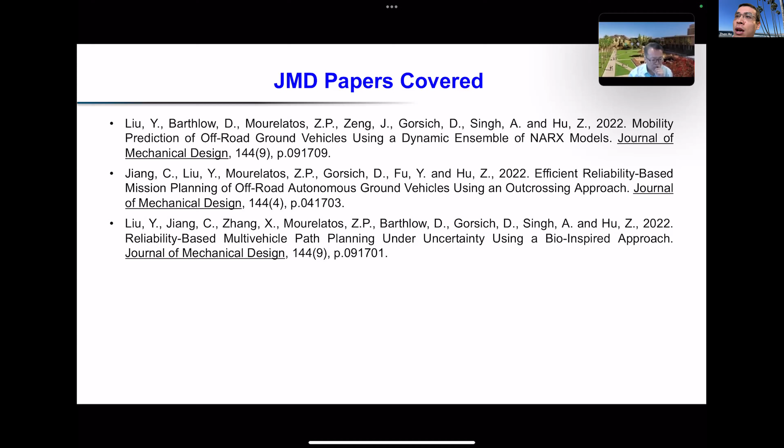So first, a little bit of background introduction. All three papers we published on Journal of Mechanical Design focus on off-road autonomous ground vehicles. Off-road AGVs are vehicles that operate autonomously in off-road environments. They have both military and non-military applications, for example mining, construction, agriculture, and exploration of Mars.

For all these off-road autonomous ground vehicles, a very important topic is mission and path planning, because that governs how the vehicle will operate in the off-road environment, and it plays a very important role in guaranteeing successful operation of the off-road autonomous ground vehicles.

In terms of path planning algorithms, in the past years many approaches have been developed, including global path planning methods and local path planning methods. Especially in recent years, for on-road autonomous vehicles, many path planning algorithms or model predictive control methods have been developed using LiDAR or vision-based detection. But those LiDAR or vision-based detection methods for on-road autonomous vehicles sometimes are not applicable for off-road autonomous ground vehicles, for many reasons.

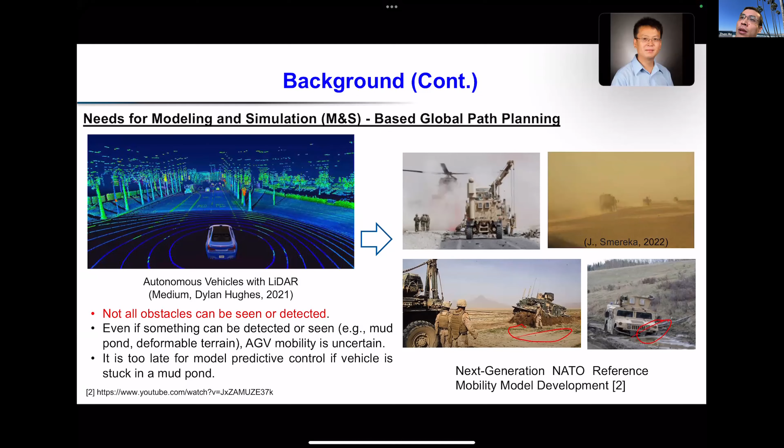In terms of physics-based modeling and simulation for mobility prediction, we start with some soil map and height map, and we also have a vehicle design in the physical environment. Based on this simulation, we can perform vehicle dynamics analysis to predict vehicle mobility, and also account for the interaction between the vehicle and the terrain to predict the speed and vertical acceleration of the vehicle.

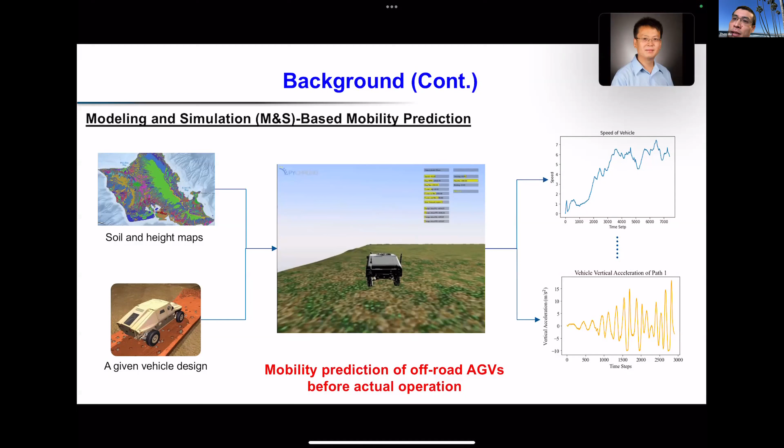But in the off-road environment, a major challenge is that it involves many sources of uncertainty. For example, for soil at any point, there are many uncertain soil parameters, including cohesive strength, friction coefficients, bulk density—these are just some examples. There is also uncertainty in the slope.

As a result, there is uncertainty in vehicle mobility. As shown on the right, due to this uncertainty, sometimes the vehicle can pass a certain region, sometimes it cannot. So it's very important for us to account for the uncertainty in vehicle mobility caused by uncertainty in terrain, soil, and vehicle parameters. By considering this uncertainty, we can better design our autonomous vehicle and incorporate post-design operation conditions into the design to ensure reliability and safety of autonomous ground vehicles in the off-road environment.

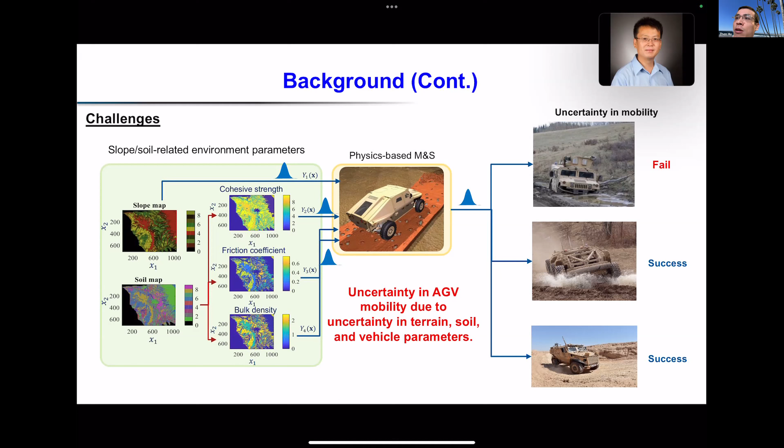So in order to address the uncertainty issue in the off-road environment, there are several challenges that need to be addressed. The first is the computational effort issue. The high-fidelity simulation model can predict vehicle mobility, but it is very computationally expensive—it cannot be directly used in our design optimization or path planning.

Our first paper on a dynamic ensemble neural network model addresses this first challenge about computational issues. The second challenge is how to incorporate the reliability constraint into real-time mission planning. The other of our Journal of Mechanical Design papers addresses this second problem.

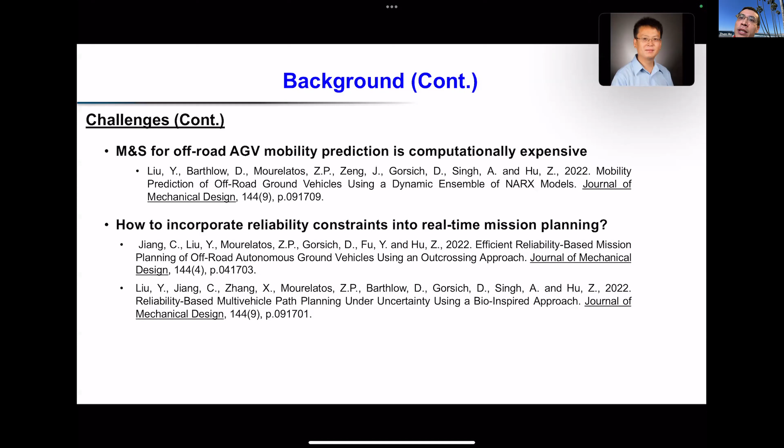Here I will give a brief overview of what we have done in these three papers. For the first paper, the overview is that we first use the physics-based simulation model. By giving some paths, we generate synthetic mobility data, and based on this synthetic mobility data, we can use AI or machine learning models to build a data-driven and dynamic mobility prediction model.

This data-driven and dynamic mobility prediction model is very cheap to evaluate, but it can accurately predict vehicle mobility, and it can enable us to perform model-based mission planning.

However, in our research, we found that none of the current available methods, including LSTM, NARX-Net, and GP-NARX, can accurately capture nonlinear dynamic behavior of the vehicle vertical acceleration due to the nonlinear dynamic system. For example, there are large errors at the peaks of the acceleration.

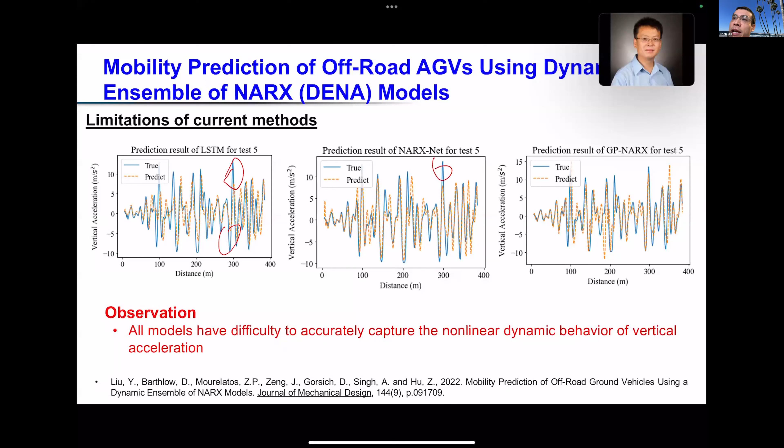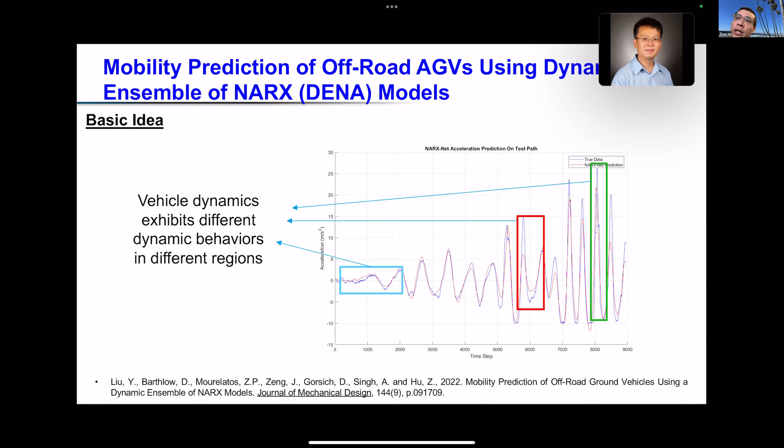Based on this observation, we also noticed that on certain paths, the vehicle dynamics exhibit different behaviors in different regions. For some regions, it has low frequency dynamic behavior. For other regions, it has high frequency vibration behavior.

Based on this observation, the idea we proposed is to partition the dynamic domain into different segments, so different segments capture different dynamic behavior of the vehicle. We construct individual NARX models for different segments, and then we ensemble them together. By doing this, it can improve the prediction accuracy of the data-driven mobility model.

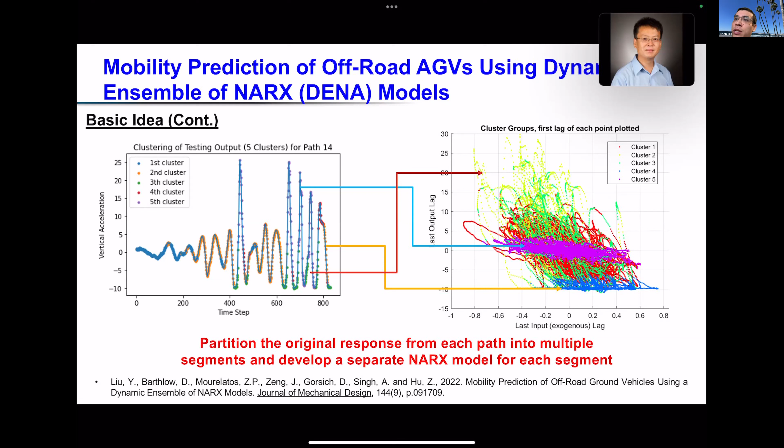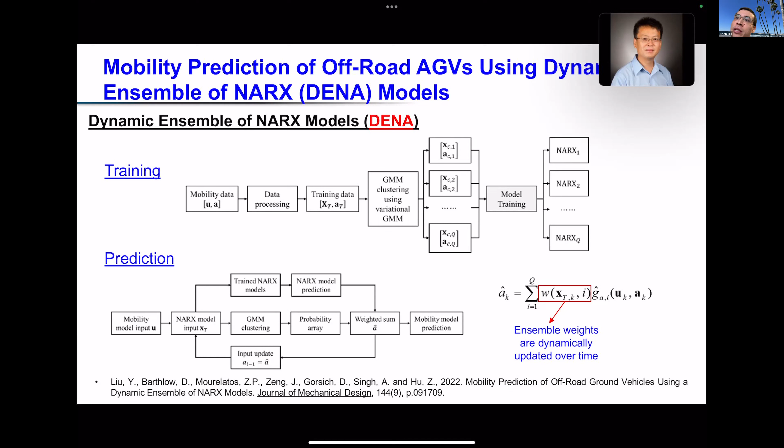This is the overview of the flowchart. It involves several steps, including synthetic data collection, partition of the dynamic domain, training of individual models, and finally ensembling them together by considering the prediction uncertainty.

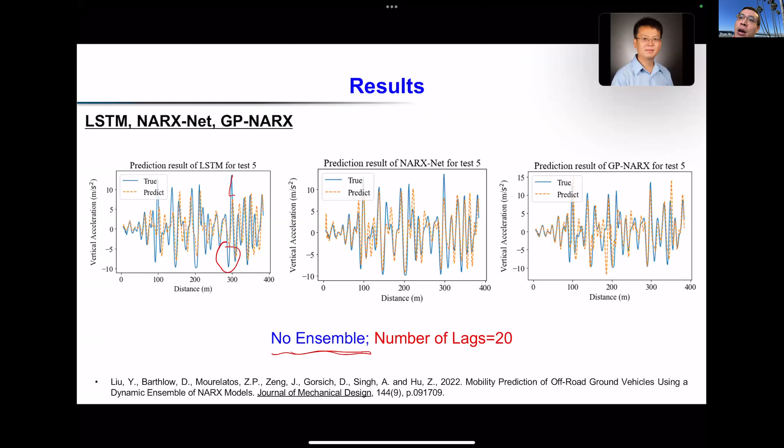Here are some results. This part shows that STM, NARX-Net, and GP-NARX, without using any ensemble, have some errors at the peak of the vertical acceleration.

So after we have the data-driven mobility model, the next question is how can we use that for mission planning by considering reliability. This has been addressed in two Journal of Mechanical Design papers.

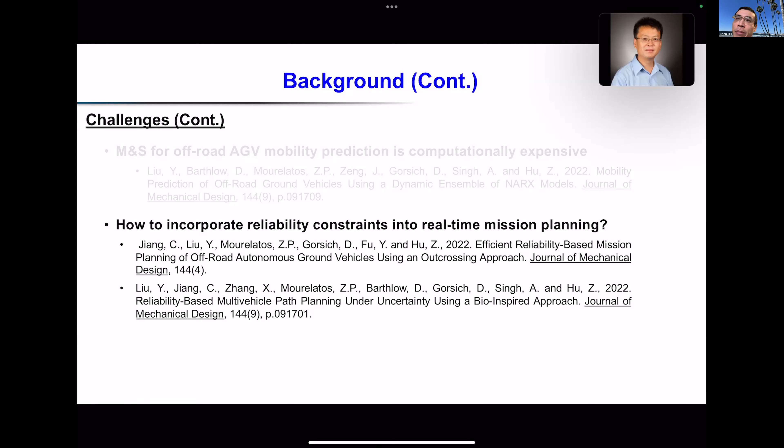The overview of the optimization problem is shown here. Our objective function is to minimize the travel distance or travel time of off-road autonomous ground vehicles. At the same time, we consider the uncertainty in travel time or length caused by uncertainty in the soil properties. We formulate the overall problem as a robust reliability-based design optimization problem.

The objective function is a robust design objective function, and at the same time, we add a reliability constraint into the optimization problem. The reliability constraint we added here is called the mission mobility reliability constraint.

This mission mobility reliability is also proposed in one of our Journal of Mechanical Design papers.

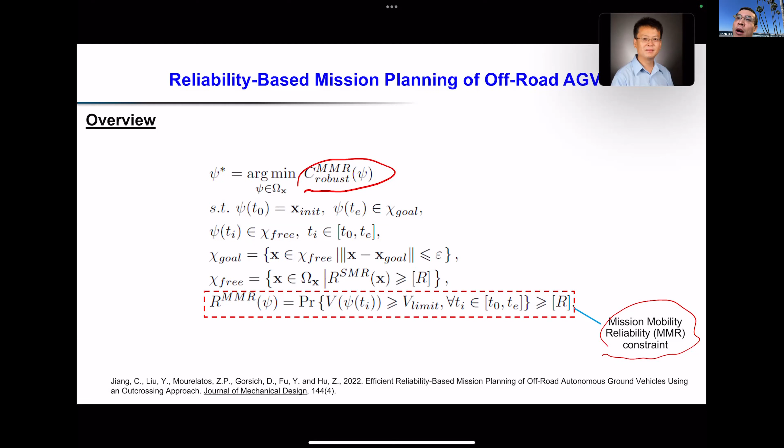In order to solve this optimization model, we created a reliable and robust rapidly-exploring random tree algorithm. Basically, we modified the RRT star algorithm by incorporating reliability constraints and robustness considerations. So every time we add a node in the search domain, we verify the reliability constraint to see if it can be satisfied.

By doing this, the final identified path from RRT star can not only be the shortest, but can also satisfy the reliability requirement.

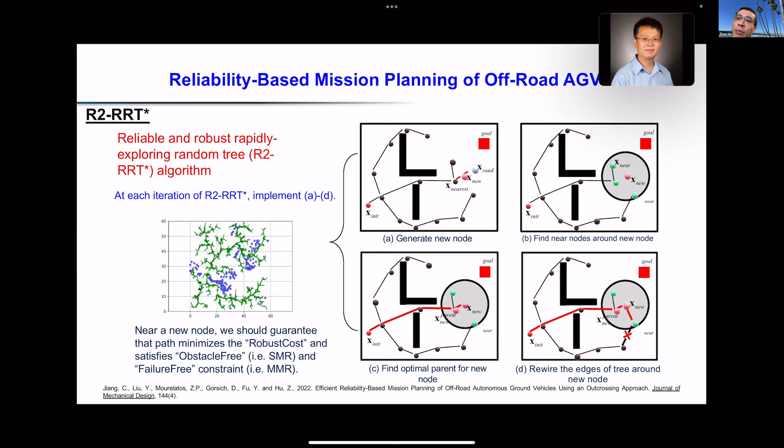But the issue with this problem is that evaluating reliability is very computationally expensive, even if we use the data-driven mobility model. If we use direct Monte Carlo simulation, the RRT star for path planning may take 1 or 2 hours. It's not practical or computationally feasible for practical application.

To address that issue, in this Journal of Mechanical Design paper, we propose an outcrossing rate based method. Basically, we compute the outcrossing rate at every spatial location. By doing that, we can convert the probabilistic mission planning problem into a deterministic mission planning problem, reducing the computational complexity.

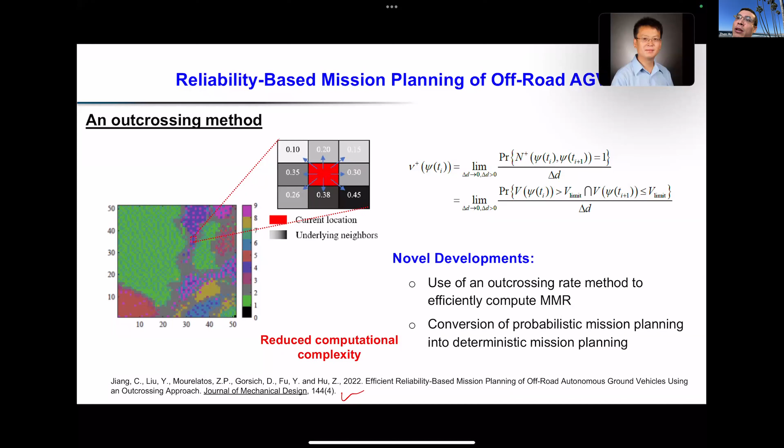The proposed method starts with the soil map, slope map, and physics-based simulation considering uncertainty, and then we generate a probabilistic map.

Using the probabilistic map, we can generate a group of outcrossing rate maps. Then we integrate the outcrossing rate maps into the RRT star, and we can identify paths that satisfy the reliability requirements. Here are some results from our proposed method.

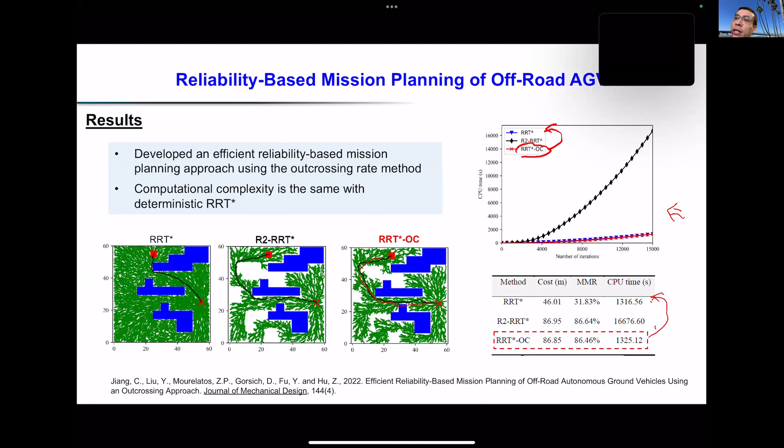And also the reliability requirement has been satisfied. So we also go one step further by looking at multiple vehicle path planning.

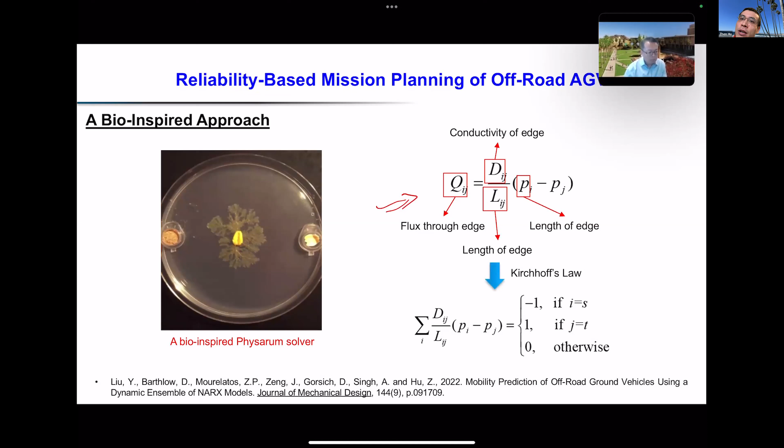We have developed a bio-inspired approach. Basically, we model the map as a graph, and then model the links of the graph using this equation. And then finally, we solve this optimization problem using a solver.

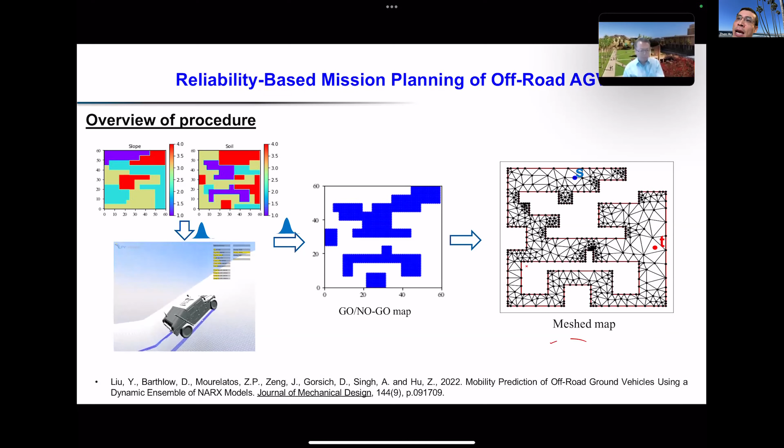So by using the solver, we also start from the simulation. We first generate a go and no-go map by considering reliability, and then we generate a meshed map. After that, we're using the proposed methods. We can efficiently identify the paths, satisfying reliability requirements.

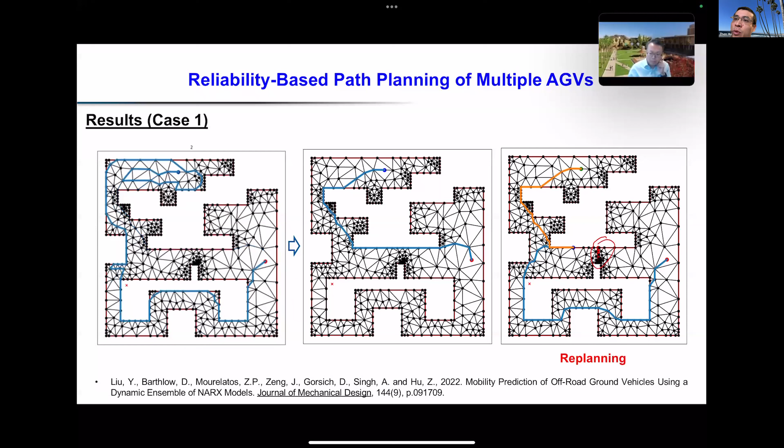Most importantly, if there is an obstacle in the middle of the path, the algorithm can very quickly perform replanning. So we also applied it to this path planning for multiple vehicles.

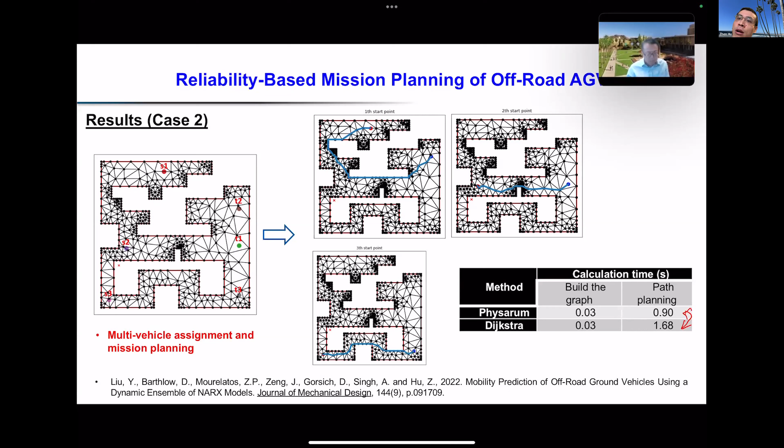Suppose that we have 3 vehicles, S1, S2, S3. We want to reach 3 targets. The proposed method can automatically allocate these 3 vehicles to the 3 targets, and at the same time, identify the shortest paths and satisfy the reliability requirements. And the computation time here is also much lower than the traditional Dijkstra-based method.

Okay, so in conclusion, here's an overview of our 3 papers published on the Journal of Mechanical Design. In these papers, we developed a dynamic ensemble method for mobility prediction. We also proposed a reliability-based mission planning algorithm by reducing the computational complexity, for multiple vehicle mission planning.

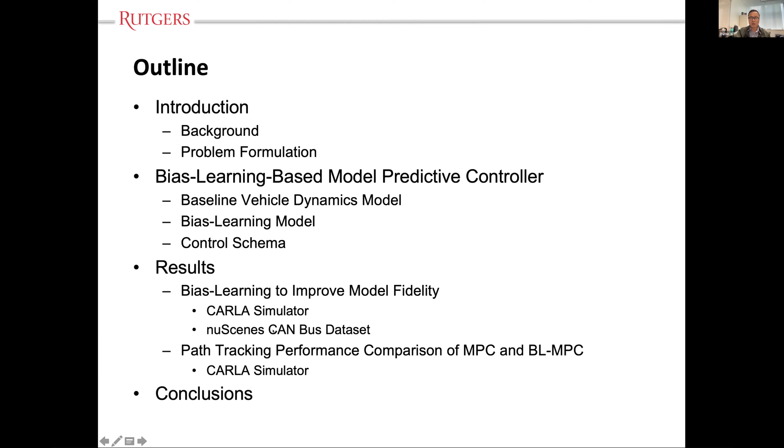So here's the outline. I will give an introduction, then I'll move to the proposed bias learning-based MPC. Then I will show you 2 results, one from the driving simulator, another from actual real-world experiment data. Then I'll draw some conclusions.

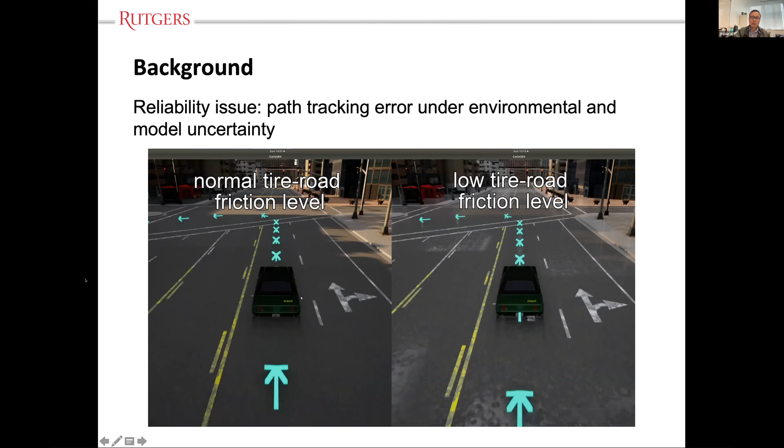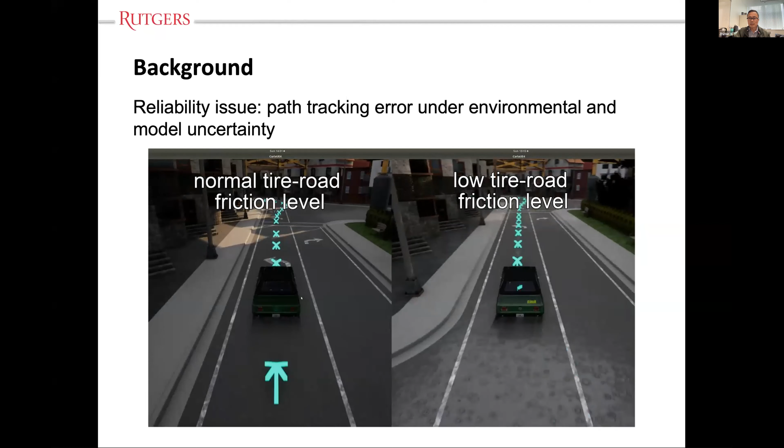So first of all, we realize there are some potential reliability issues for path tracking if you ignore environment and model uncertainty. On the left-hand side, I show a good situation: good weather condition, good tire conditions. On the right-hand side, we have a relatively bad situation. Now, if you rely on model-free, let's say PID control, or other low-fidelity models, you will have a reliability issue, as you can see on the right-hand side.

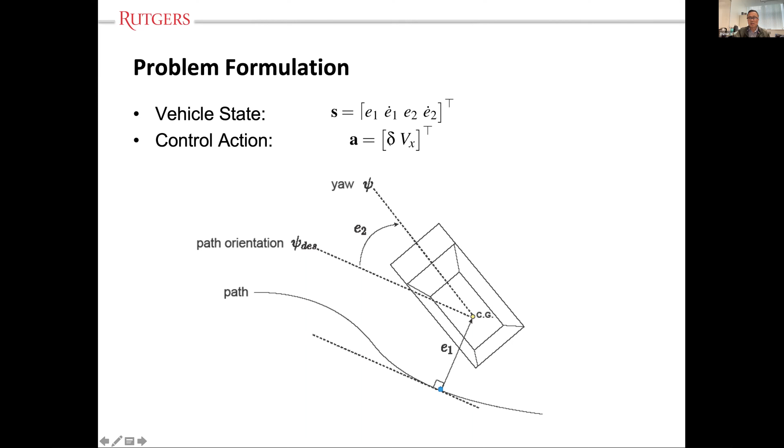And the vehicle action space is only 2 dimensions: one is the steering angle delta, and the other is the vehicle's translational velocity.

Now, since we're going to rely on this MPC, model predictive control, we have to use a physics-based vehicle dynamic model. The model we're going to use is the so-called bicycle model. Basically, in this simplified version of the vehicle dynamic model, we merge the 2 front tires into 1 front tire, and merge the 2 rear tires into 1 rear tire, so it seems like a bicycle—that's why it's called a bicycle model. In this bicycle model, we also consider the slip angle of the front tire and the rear tire.

You can see in this diagram, the front tire has a heading, the steering angle delta, but the actual motion of the front tire is different from the steering angle. So we have alpha F as the slip angle from the front tire, and also the slip angle alpha R from the rear tire.

Now to quantify this vehicle dynamics, we have differential equations, and all the vehicle states can be represented by this so-called baseline vehicle dynamic model.

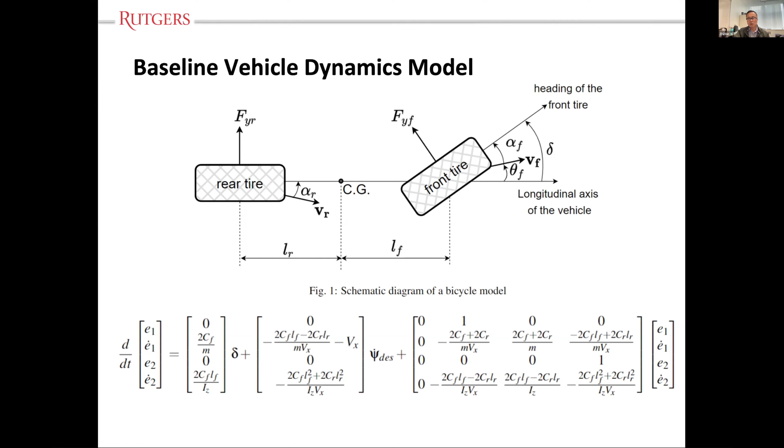The proposed approach is that because of these simplifications, if we consider the actual motion of the actual vehicle, this simplified model will give us some error, and that error could lead to unreliable path tracking.

So the proposed approach is that we're going to use this baseline vehicle dynamic model, but in addition, we're also going to add a machine learning model. This machine learning model tries to learn the bias of this baseline model compared to the actual observation. So that's the bias learning model.

We propose 3 different methods to do that. The first is a Gaussian process. We also use a recurrent neural network, an offline version and an online learning version. So 3 models to try to learn the bias, and we did some comparison.

In this setup, the input we're going to take is 4 vehicle states and a 2-dimensional vehicle action space. We also have the environmental variable, which captures the tire and ground friction coefficient for the vehicle. The output of this model predicts the next states of the vehicle at the next time step.

In terms of the overall control principle, based on this BL MPC, at every control cycle, typically 0.1 second, we need to solve an optimization problem. We try to minimize this objective function, and in this objective function there are 3 terms.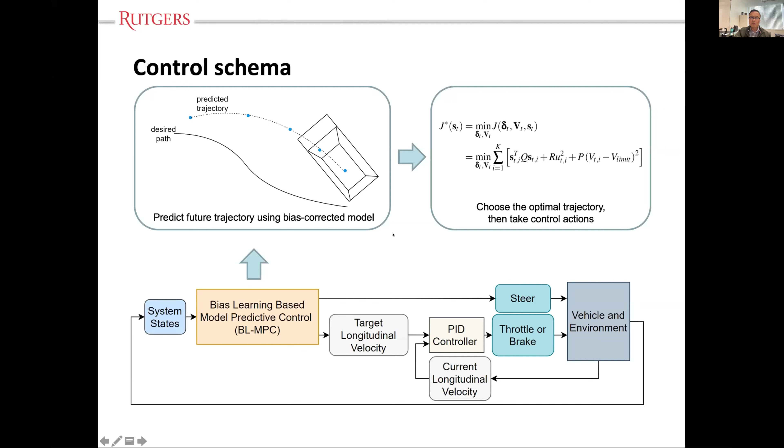And the third term, we try to make the vehicle run as fast as possible up to the speed limit. But of course, we need to keep this stable.

Now, in order to learn this bias model, we have to get training data. As previously explained, we have an input space defined from 4 vehicle state variables, a vehicle action space with 2 variables, and 1 variable for environmental uncertainty.

And then the output we take is the actual observed vehicle state, subtracting the predicted vehicle state from the baseline bicycle vehicle dynamic model.

When we did this training in the simulator, we conducted about 30 minutes of training, with every control cycle at about 0.1 second. So 30 minutes means 30 times 60 times 10, giving us about 18,000 training data points for 30 minutes of simulation.

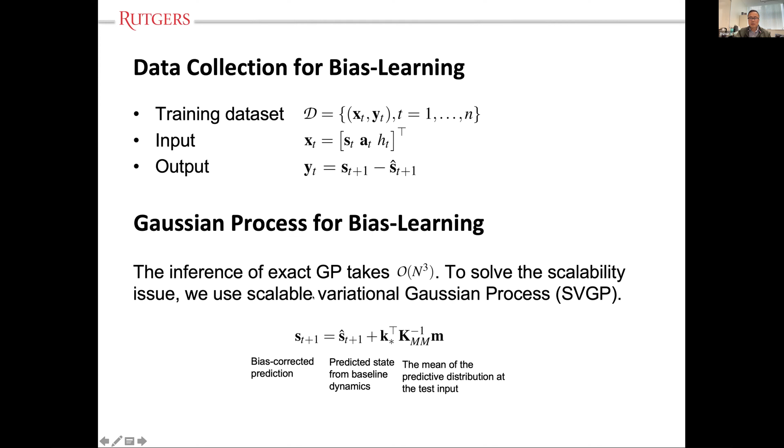Now, in order to build this bias learning model for this large data point set, the traditional Gaussian process has an issue because of the large data size. That's why we adopted this so-called scalable variational Gaussian process. We basically get representative sample points so we can reduce the matrix inversion operation, so that this Gaussian process can be used for bias learning.

Now, the second model we used is a recurrent neural network model. I'm not going to show the detail, but the hidden node in the recurrent neural network model is the key thing, and each hidden node is represented by a so-called activation function. That activation function takes all 7 input variables xt, and also takes the previous hidden state. That's why it's called a recurrent neural network, and it also has a bias term.

We can define different numbers of hidden nodes and different numbers of layers, and the output will predict the next time step vehicle states. So that is the offline version.

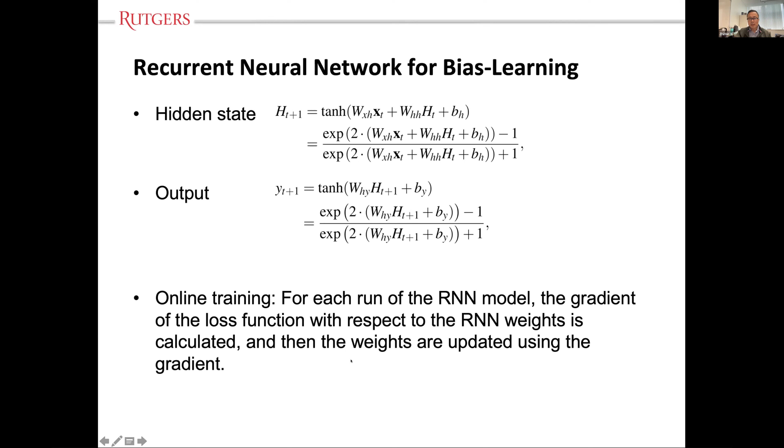In addition, we also have an online learning version. The online learning version is basically, we have an offline RNN model learned, but when the vehicle is really doing the control, it also observes the actual bias and tries to further update the weight coefficients in the offline learned RNN model, so that we expect this online learning model to be more accurate.

Now, to validate our proposed work, we found a real world data set for autonomous driving. This is a nuScenes data set. It has all different situations.

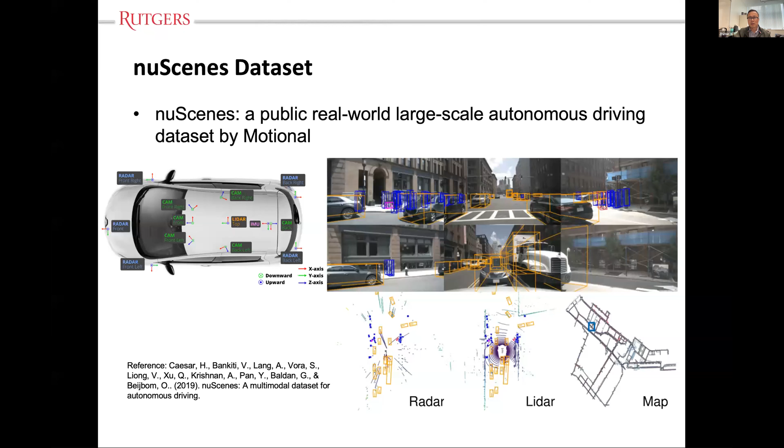For this particular problem, because we are working on a lower level control problem, we need a lot of detailed information. This nuScenes CAN bus expansion dataset is able to provide the information we need for our validation work. So here I just show you one of the scenarios.

For example, it provides a high precision map, and it has its defined path. Then it knows the vehicle's actual position, and it knows the vehicle's actual pose all the time. At the same time, at any time instance, we know all the vehicle's real vehicle speed and wheel speed. So we know all the information we need for our model to do the validation. That's why we use this nuScenes CAN bus dataset.

In this dataset, we have a total of 1,000 different driving situations. We split this dataset into a training dataset, about 70%, then 20% used for validation, and 10% for testing. To quantify the tracking error accuracy, we use the mean absolute error as a metric. Once we validate on the test data, we calculate all the MAE, and we get the average value.

Now we compare 3 methods: one is a simple baseline model based on the MPC, then we have offline RNN and online RNN. You can see the MAE difference. Basically, the online RNN model provides us the best tracking error, the minimum tracking error from the density functions. The baseline model provides us a relatively large tracking error.

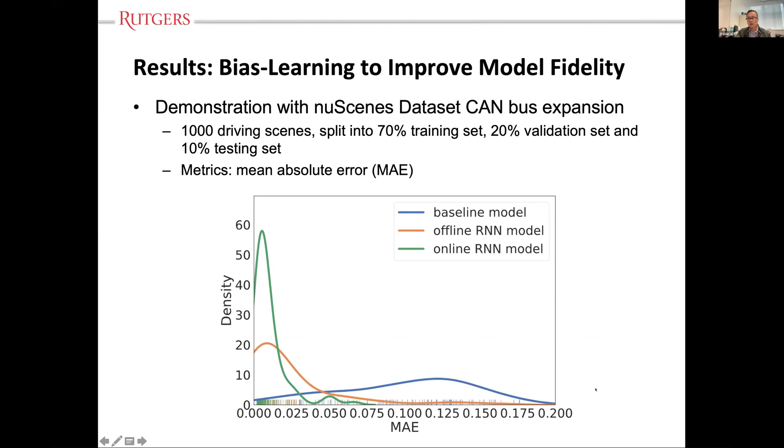That is a result from the existing experimental data, but we also further confirm those results using our CARLA simulator. In the CARLA simulator, we have different driving maps and different driving situations, and we use some as the training scenario. Then we do the test at the actual situations.

In this table, I show you 3 columns of results. Basically, mu equal to 1 reduced to 0.25 means increasingly worse environmental conditions, so we have harder control situations. Then we compare the baseline model with the Gaussian process, and the offline version RNN and online version of RNN in terms of tracking error. In all these scenarios, the online version RNN provides us the minimal tracking error.

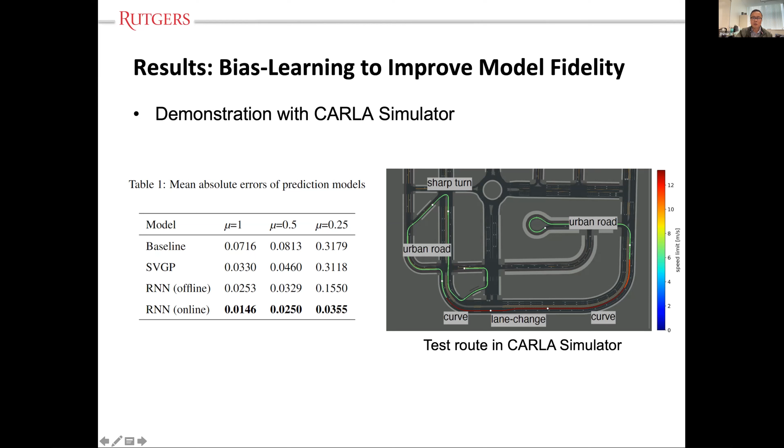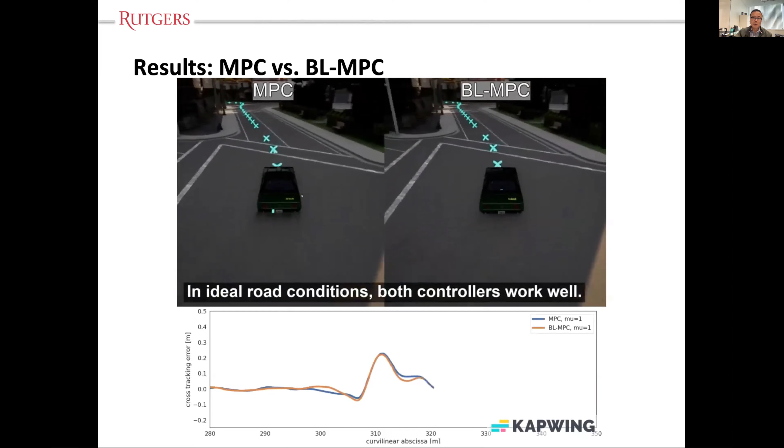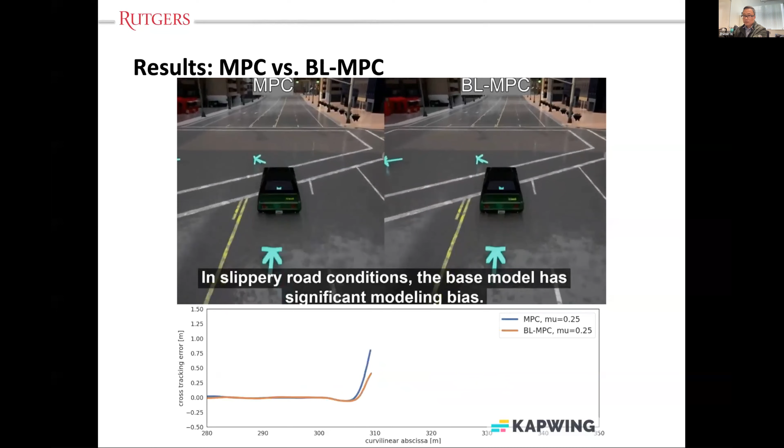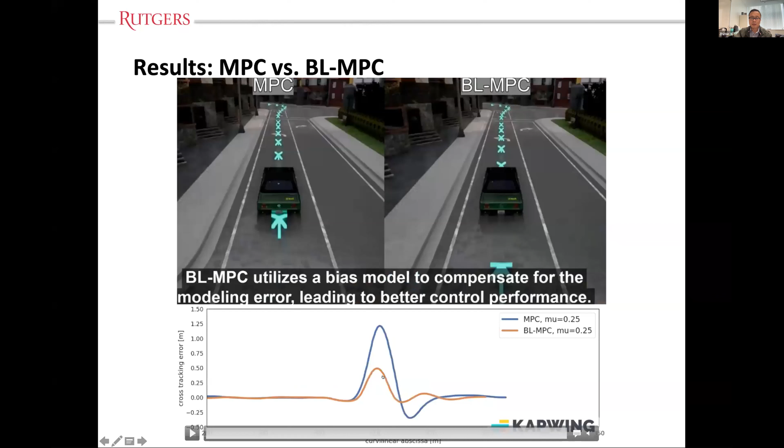Here I show you one of the comparisons between MPC and BL-MPC using the CARLA simulator. This is a situation with good weather conditions, and the bottom figure shows you the actual cross-tracking error with respect to time. Then we have worse situations. Compared to MPC and BL-MPC, BL-MPC always provides a smaller tracking error if we are able to learn those biases accurately.

So the conclusion is that we basically proposed bias learning based MPC, and that can generate more reliable control under different driving situations for autonomous vehicles. We also use the RNN, and this RNN with online learning feature performs best, because the reason is this model bias model is also adaptive to real-time situations. In our problem, we found the RNN performs better than the Gaussian process, especially because it has its recurrent feature, which is important in this setting, because all the previous states will somehow determine the next future state. That can be captured by the RNN structure.

So that's all for my talk.

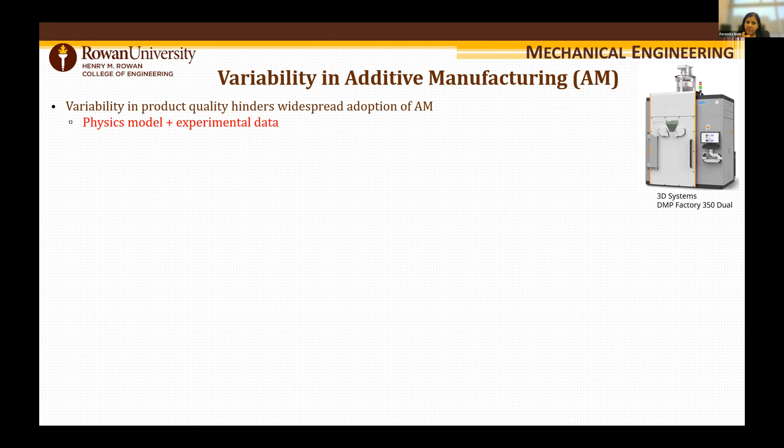Additive manufacturing is a technique that is widely popular in this world nowadays, but due to the variability in product quality, it is still not widely adopted across all industries. The trial and error process of finding out the optimal process parameters is expensive, and no physics-based model is accurate. So there is a push for using an integrated process of combining physics-based model predictions with some experimental data.

So there is this need for optimization of the AM processes, and also for process optimization during the manufacturing, which is basically process control. Now, when we talk about models and about additive manufacturing in general, there are different kinds of uncertainties and variabilities in the AM processes. These uncertainties, which are inherent to the system and the process, are the aleatory uncertainties.

There is also lack of knowledge, which leads to epistemic uncertainty that could come from model parameter, model form, and also from input uncertainty. Additive manufacturing is a complicated process, so all these processes need to be defined by different physical processes, requiring multi-physics, multi-scale models, which leads to more sources of uncertainty.

So we need to quantify and reduce the uncertainty, and that can be done under the Bayesian framework using verification, calibration, validation, and better characterization through experiments, etc. And then we also need to do uncertainty management.

We have reduced the uncertainty that we can, but we still have to live with some of it. That is where you need process optimization and control under uncertainty - process optimization that requires offline information, and process control, which gets the most up-to-date knowledge during the manufacturing process.

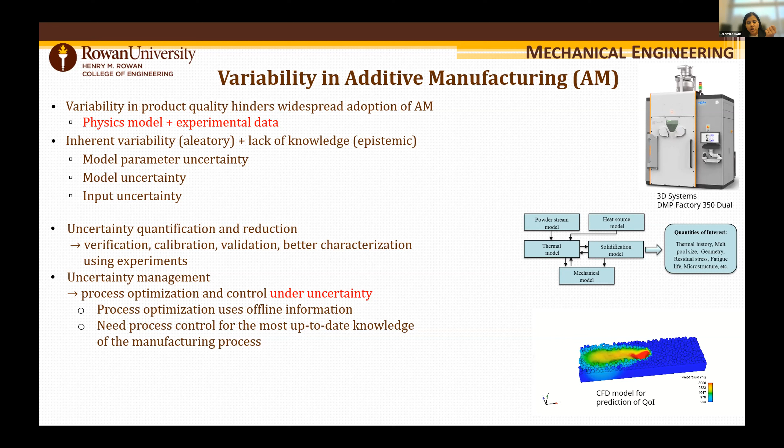This leads to the concept of digital twin, but since there is so much uncertainty in the process, this is not a deterministic digital twin, but a probabilistic digital twin.

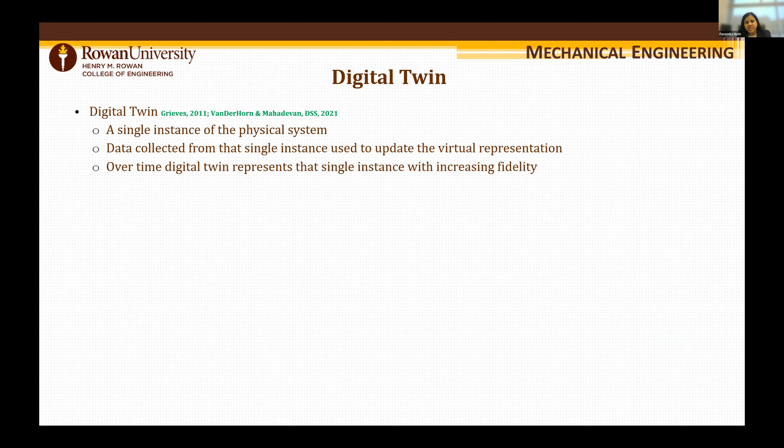Now, how do we define a digital twin? The work on digital twin is a few decades old, and one of the definitions that Grieves and Vickers came up with in 2011 is that a digital twin is a single instance of a physical system, and the data collected from this single instance is used to update the virtual representation. Over time, this digital twin now represents that single instance with increasing fidelity.

So there are three different elements of a digital twin: the physical system, in our case the printer itself, and a virtual representation of the system. These two systems are connected through two interconnections - a connection from the physical reality to the virtual space and from the virtual to the physical.

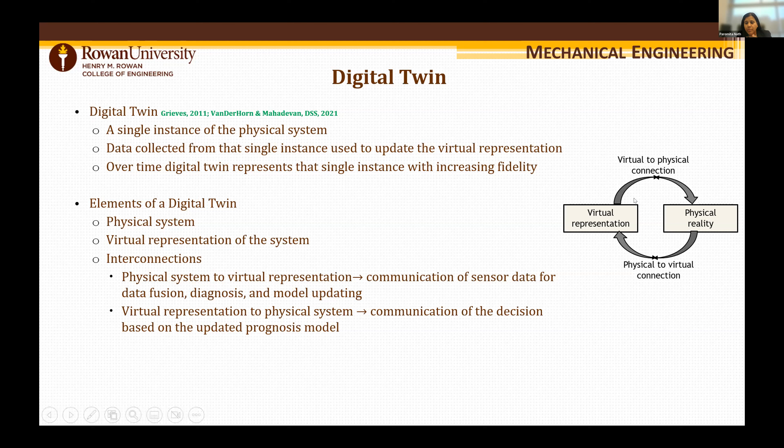One connection leads to the communication of sensor data, which is for data fusion, diagnosis, and model updating, whereas the other connection leads to decision making - how do we update using the updated prognosis model, and how can we make decisions for the physical reality.

So in this work, we are concentrating on digital twin for the laser powder bed fusion process. The physical process is actually the additive manufacturing machine itself. The digital model, which consists of the CAD model and the STL file, feeds into the AM machine.

During manufacturing, we can monitor the system using the monitoring system. The virtual representation of this would be a physics-based model, and as I said earlier, one model may not be enough, so we may need a suite of physics-based models. Now, this is extremely expensive, and for decision-making while the process is going on, we need faster models, so we substitute this with a surrogate model, which gives us the prediction or the predicted QOI.

These two are then connected using the sensor data, which goes from the physical reality to the virtual representation. We do the model updating, find out what should be the print parameters for the future layers, and feed it back to the physical reality. This goes on for all the layers of the laser powder bed fusion process.

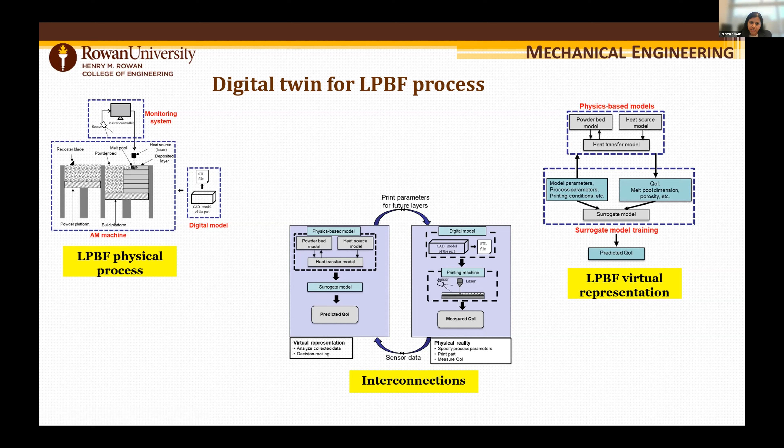So the basic method for this work is based on the concept of digital twin for laser powder bed fusion, where our quantity of interest is the lack of fusion porosity due to insufficient melting.

When we have the LPBF process, there are scans going on, and based on the distance between two scans, called the hatch spacing, and the thickness of each layer of powder, we will have some unmelted volume fraction - basically powder that gets trapped between molten volume and has never been melted because of insufficient heat in the process.

So if we want to control this unmelted volume fraction, which is basically a measure of porosity, we need to construct and deploy a digital twin. This consists of 9 steps.

We start with an initial virtual representation. We validate that virtual representation. We collect monitoring data, diagnose and infer the quantity of interest, which tells us what the current state is. Then we update the model.

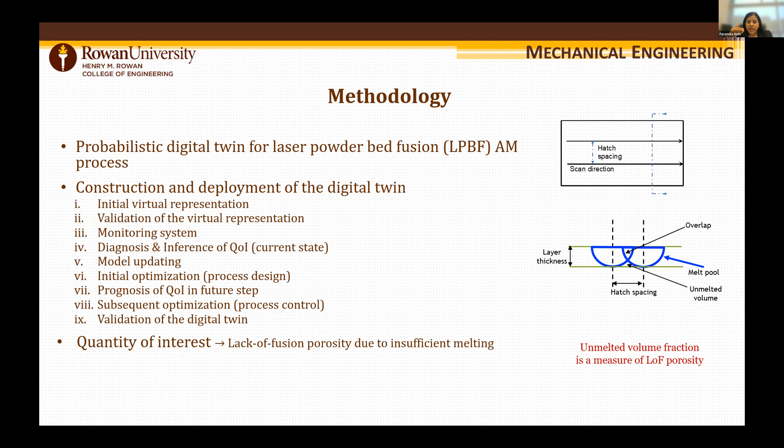We find out what is the initial process optimization, what initial process parameters we should start the manufacturing with. Then we can do the prognosis of the quantity of interest in the future step. Then we can optimize, which is the process control during each step of printing or for each layer. And then we also need to validate our digital twin.

So for the initial virtual representation here, we are using a very simple Rosenthal model, but whenever high fidelity models are available, you can obviously use that.

So this geometry-based model first starts with finding out what is the width of the melt pool, and from the width we can calculate what would be the unmelted volume fraction.

Now this initial representation can be validated, but we are not collecting data to validate this model at this step. We will use previous experiments or experimental data from literature or publicly available data to validate this.

For this, we could use different kinds of validation metrics, but in this paper we are using the model reliability metric, which is a distance-based metric that tells you the probability of the difference between the prediction and the observation.

If it is within a tolerance, then we are okay with this model, and then we can proceed with that. If not, then we need a better model.

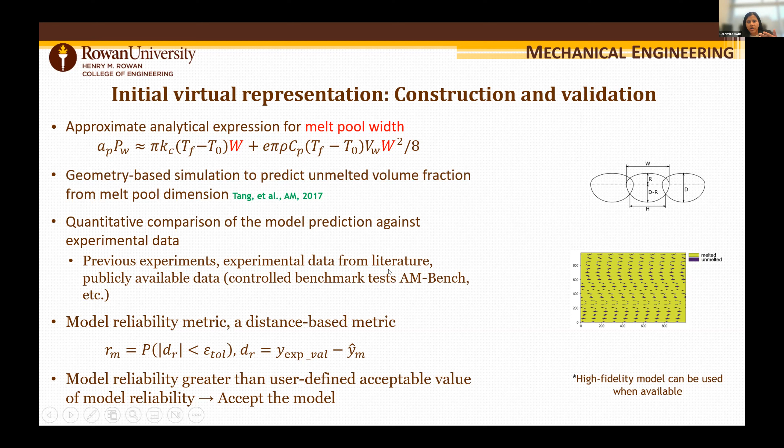So next, we are going to do the diagnosis and inference of the quantity of interest. And for a digital twin, an effective monitoring system is an online, non-destructive, non-contact monitoring system, which then gives us the current state of the manufacturing process and also the part.

And we can then find out our quantity of interest. If the quantity of interest is directly observable, for example surface roughness, which we can measure using a profilometer, or temperature distribution, which we can measure using thermal data or a thermal camera, then it's simple.

But some of the quantities like residual stress or other subsurface defects and porosity cannot be directly observed. And so in that case, which is the case in this paper, we need an indirect measurement technique.

And so here, if our quantity of interest is porosity, we do an intermediate quantity measurement, which is through the IR camera. We collect the temperature data, and then we infer our porosity from this melt pool dimension that we get from the collected temperature data.

And finally, when the part is actually finished, we can use offline techniques like X-ray computed tomography to find out what is the actual porosity of the part.

Now, because of this indirect measurement, we need a two-step surrogate model. The first step predicts the melt pool width, and the second step predicts the unmelted volume fraction.

The model parameters and the discrepancy term are calibrated using the temperature data, because that is the only data that we are able to get during the manufacturing process.

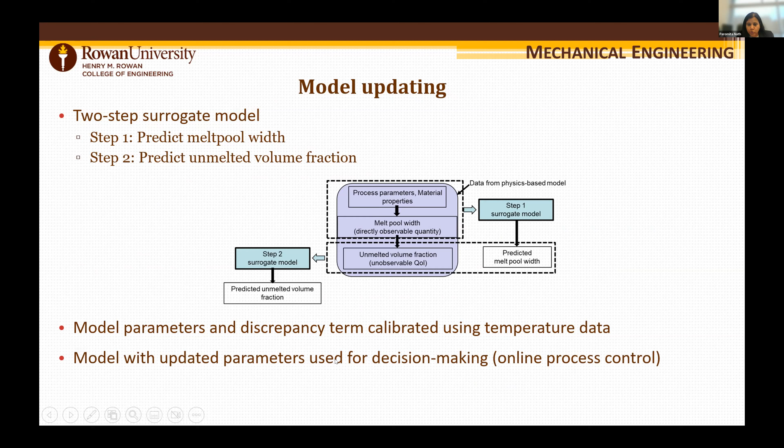And this model, which is updated with the new parameters, is now used for decision making, which is the online process control part. So the initial process optimization, or finding the optimal parameters before the printing has started, is based on data that is available before manufacturing.

So it does not consider the most up-to-date knowledge of the manufacturing process.

And here, to consider the uncertainty, we are using a robust design optimization algorithm, where we are not only interested in minimizing the mean, we are also interested in minimizing the standard deviation of the objective function, thereby minimizing the variability in the process. So once we do that, the manufacturing starts with the optimal process parameter.

We use the monitoring data to infer what would be the quantity of interest, or the porosity, when the part is finished. We can then model the discrepancy term, and we can calibrate it using the monitoring data.

This is our updated model, and this updated model is used for decision making. How do we make the decision during process control?

If the predicted quality of the finished part is better or equal to the target quality, then we can just continue as is. If it is less than the target quality, very, very bad, then there is no point, we cannot salvage this part at all.

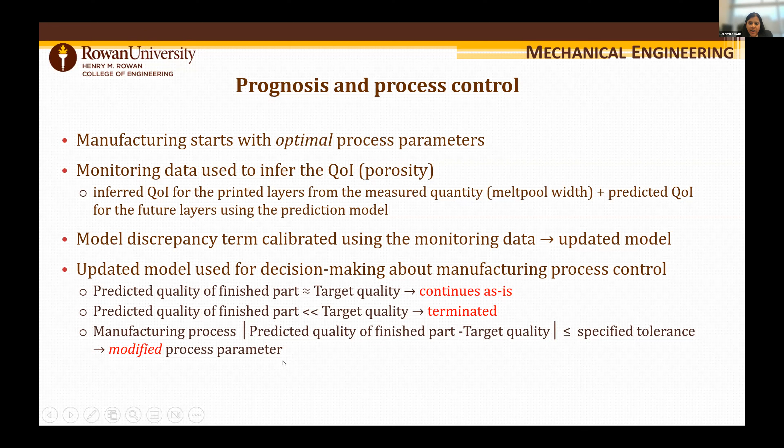Then we can terminate this manufacturing process. However, if it is somewhere between the target quality and we can maybe change some process parameters and do something about it, then we would do modified process parameters. We'll change the process parameters and try to salvage the part.

Which then finally brings me to the validation of the digital twin. Now, digital twin is specific to the printer, the printing environment, and the part being printed. So when we need to validate the digital twin, the experimental data has to come from the same system.

Here we do the two-step validation of the digital twin because our quantity of interest is not observable during manufacturing. So we do the intermediate or partial validation using the melt pool width, by using the data that we collected online, and the final validation is when we collect data offline after the part has been printed. And here again, we use the same model reliability metric to do the validation.

So this is the summary. We start with a virtual representation, do the two-step surrogate, validate the initial prediction model. We collect data from the online process monitoring system, find the optimal process parameters, collect experimental data, calibrate the model parameters, and that is how we update the model, do the partial validation, estimate the quantity of interest.

If it is okay, then we continue. If it is too bad, we terminate the process. And if it is somewhere in between, then we do new process parameters and continue the process like that.

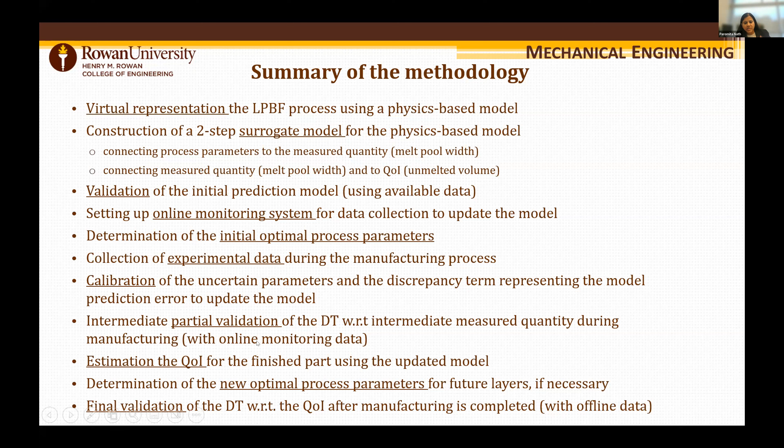So now I will quickly show you how we implement this. We can consider a small part, and we are trying to control the unmelted volume fraction here.

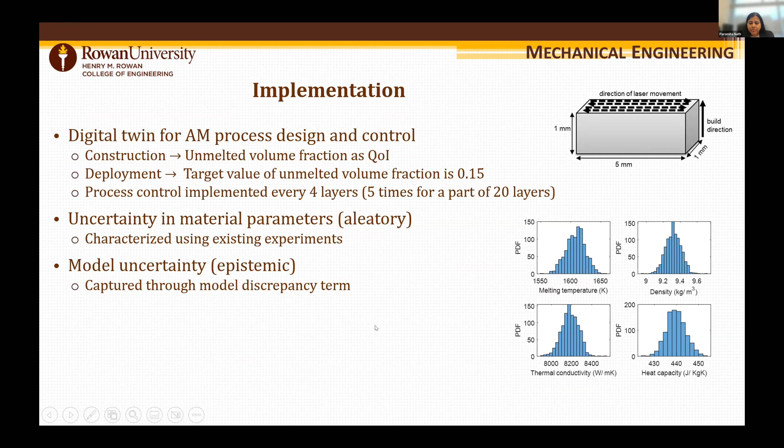The uncertainty in the material parameters is the aleatory uncertainty, and the epistemic uncertainty is captured through the model discrepancy term. We use our initial virtual representation using the Rosenthal equation I showed before.

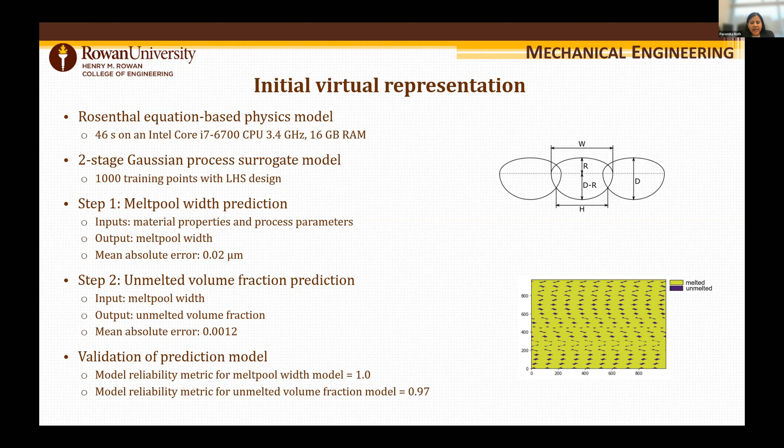We have the two-step Gaussian process surrogate model. We validate that model using the data that is already there. Then we do the offline process parameter optimization where we find the initial design parameters, and then we can start printing.

Here we simulate a malfunction in the print environment, and we say that whatever the laser power applied, it is realized as 10 watts less than what was specified.

We collect data using an infrared camera, and we get offline data from X-ray tomography. We can also do the discrepancy term and model updating, and we see that as we collect more and more data, the uncertainty in the discrepancy term reduces.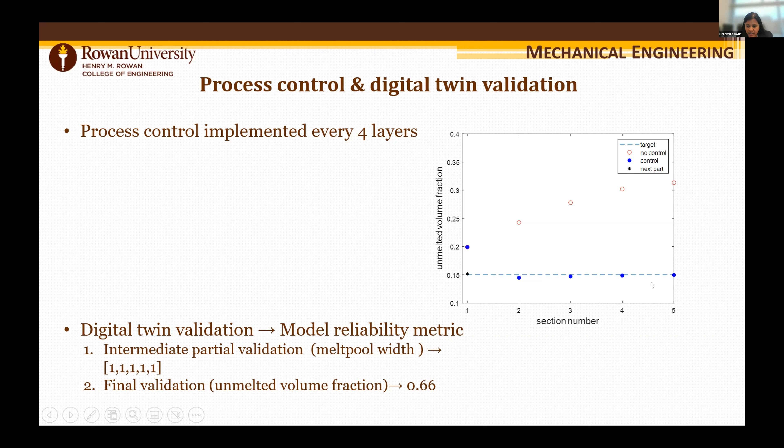So finally, in this work, we propose a probabilistic digital twin for optimization and control in the LPBF process, and we see that parts with control exhibit better quality than the no-control case.

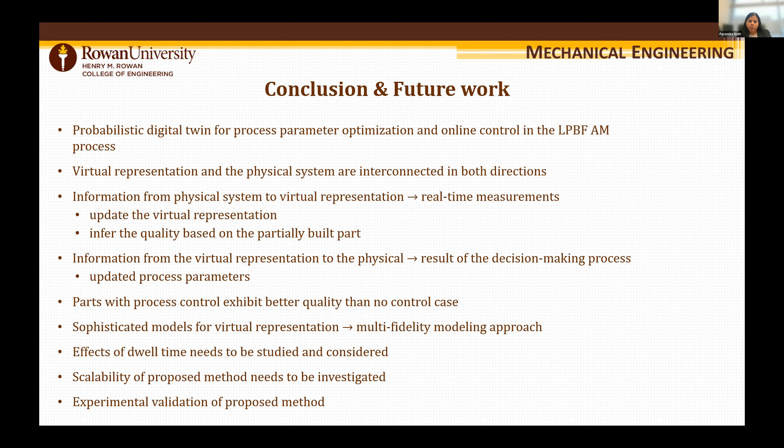Future work is to use better, more sophisticated models, which might require a multi-fidelity modeling approach. We need to investigate the effects of dwell time, and how this model or methodology can be scaled for larger systems. We also need to experimentally validate the proposed method, because right now we have just used synthetic data generated from the models. With this, I'll conclude the talk, and thank you.

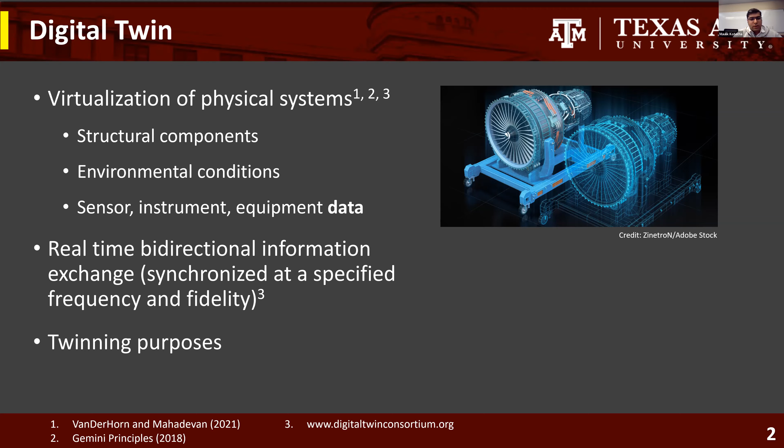Digital twins are also designed at various scales. There are examples of digital twins of big cities, factories and plants, cars and airplanes, and digital twins of processes as well as components and whole products. For the purpose of this study, to begin with, we will focus our study on digital twins of products.

So with the motivation of answering research questions like how does product architecture of the physical twin affect the architecture of digital twins, and how does twinning purpose affect the digital twin product architecture, and with a motivation to equip digital twin designers with a familiar approach for early stage design concept generation and design synthesis, we proceeded with functional modeling based architecture representation.

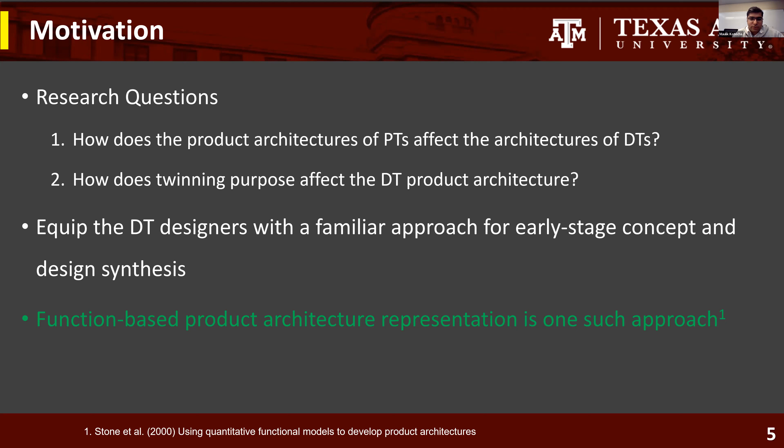Just to note that it is just one of the familiar ways to designers, and it is just one such approach. Although the audience of this webinar might be quite familiar with the concept of functional modeling, it's customary to give some background.

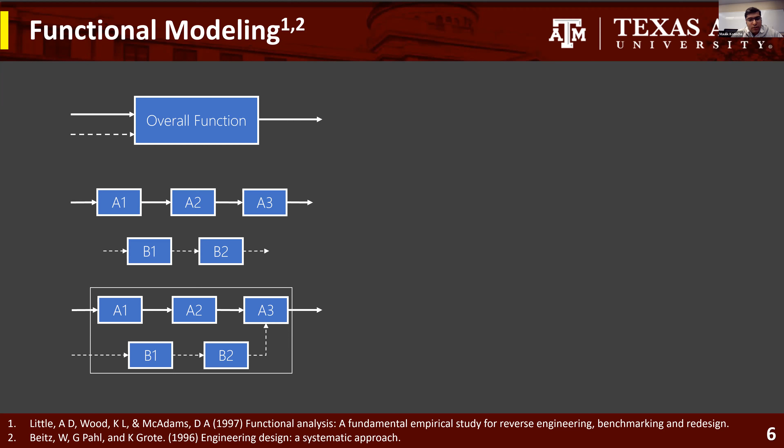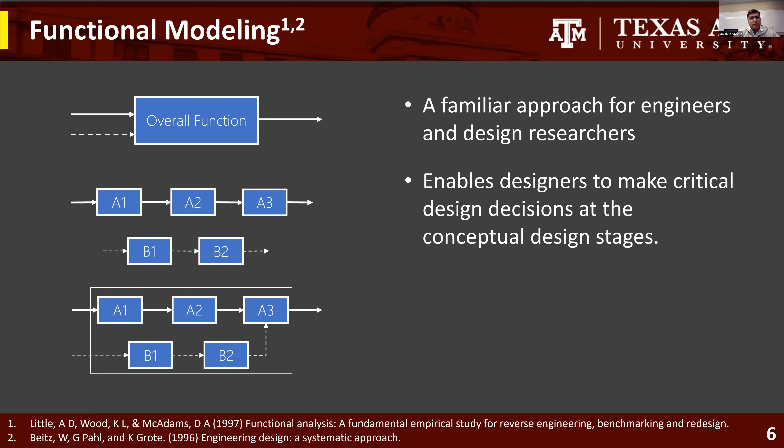Functional modeling is basically an abstraction technique that involves decomposing a product or system's overall function into smaller, solvable functions. First we generate a black box model which represents the overall function. Then we create function chains based on sequence of occurrence of these functions, and then we aggregate these function chains to create our functional model. It is basically a familiar approach to the design community, and it enables designers to make critical design decisions at the conceptual design stages.

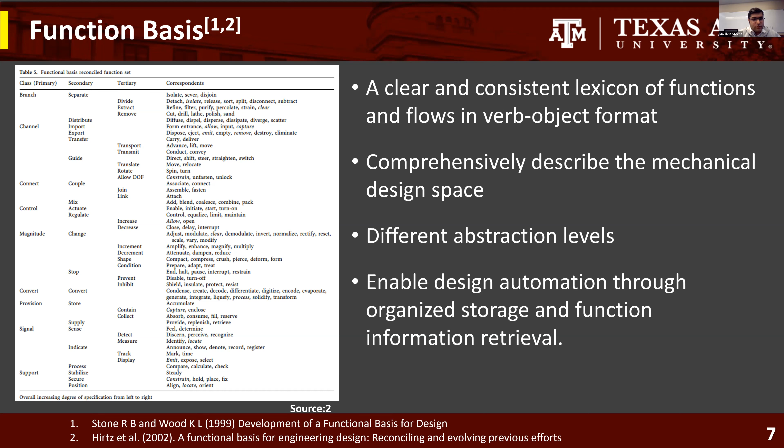Function basis is basically a clear and consistent lexicon of functions and flows in terms of verb-object format, and it comprehensively describes the mechanical design space, providing different abstraction levels. Based on our design purpose, we can choose different abstraction levels for our functions. Functional basis enables design automation through organized storage and function information retrieval.

So with this background on functional modeling and digital twinning, we created a black box model for a physical twin-digital twin pair. In this black box model, we have distinguished signals of data, information, and status, since they are profusely used in digital twin representations in the literature.

Data is basically the data collected from the sensors, be it on the physical product or some environment data collection. Information is something based on which we make decisions, so it's sort of process data, and status is the representation of the status of the components in the physical twin.

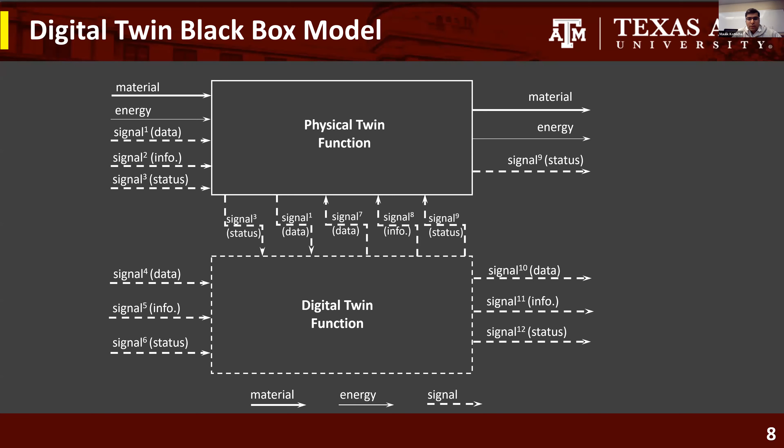Let us begin to explain our approach using an example of a breathalyzer designed to screen COVID-19 using the breath of the subject. This breathalyzer we designed as a rapid response to the COVID-19 pandemic, and it is a moderately complex product with 13 sub-assemblies and around 170 unique components.

It involves interdisciplinary knowledge and efforts, and the twinning purpose for this product was to remotely operate the breathalyzer and perform fault prognosis of the components.

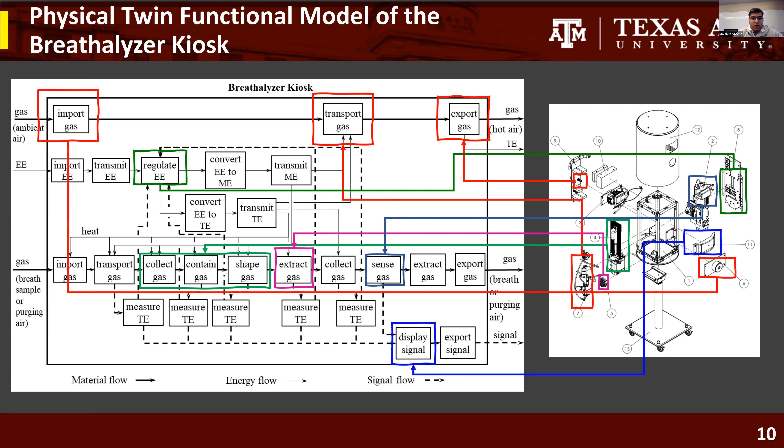Following the standard procedure I described earlier, we created a functional model for the physical twin of the breathalyzer first. I'm showing the mappings of a few structural components to their respective functions here.

We then followed the same procedure to extend our functional model to the digital counterpart. In this particular model, we used standard flows observed in functional basis to represent the digital twin as well. However, in this model, we cannot distinguish between data, information, different types of models, different types of rules that we use to evaluate our decisions, and the readily available knowledge bases that we use.

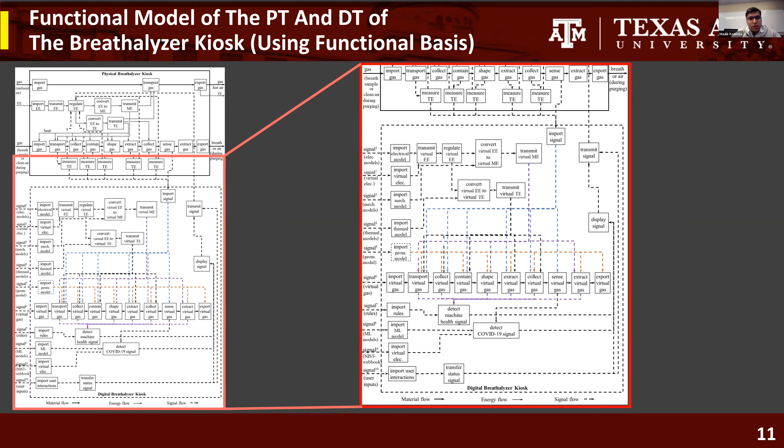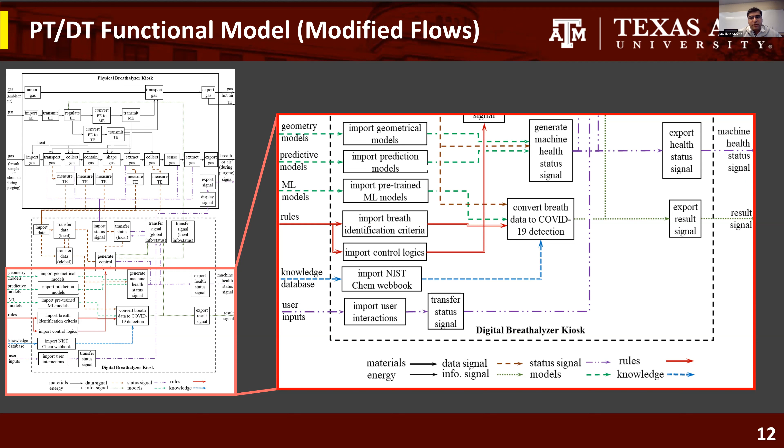So in our revised approach, we extended the functional basis with additional flows. We added flows such as data, information, status, knowledge, models and rules, as observed here, so that it could help us distinguish during the concept and function synthesis stage.

Our ongoing work is to rigorously test the applicability of these newly introduced functional flows and analyze these functional models of digital twins as networks or graphs. We are also working on developing a multi-layer graph representation approach for these models.

Our next future work is to find appropriate measures to evaluate similarities and dissimilarities between two or more digital twins. Next, we'll proceed to identify modules in digital twins based on these similarities and dissimilarities. Finally, another ongoing work is on design heuristics development for the design of digital twins.